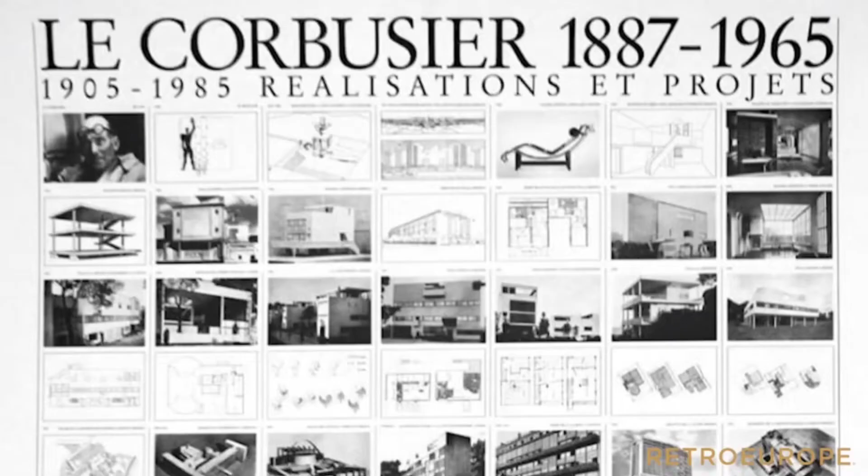Charles Edouard Jeanneret was born on October 6, 1887 and died on August 27, 1965. He was known as Le Corbusier, of international fame as an architect, designer, painter, urban planner, writer, and one of the most influential pioneers of modern furniture.

Without any formal education in architecture, Le Corbusier became a self-taught accomplished architect. In the 30s he was looking for ideal proportions, and he managed to define a system based on the golden number.

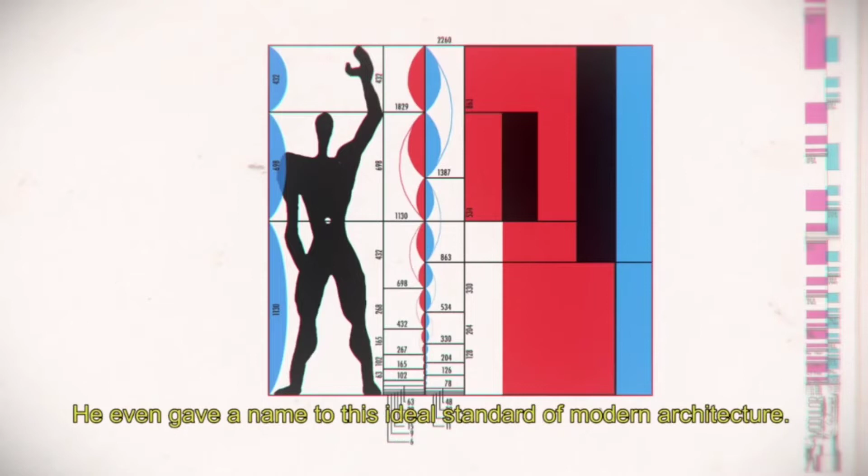This forward-thinking measurement system is based on human body proportions. He even gave a name to this ideal standard of modern architecture: the Modulor. It is based on a 6 foot tall figure, like an average American height, with his hand raised to 7 feet 5 inches. These proportions could be universal.

The 5 points of modern architecture: take a house, break free the floor from the grip of the ground and increase the space of the garden, and free the space of the roof and turn it into a terrace.

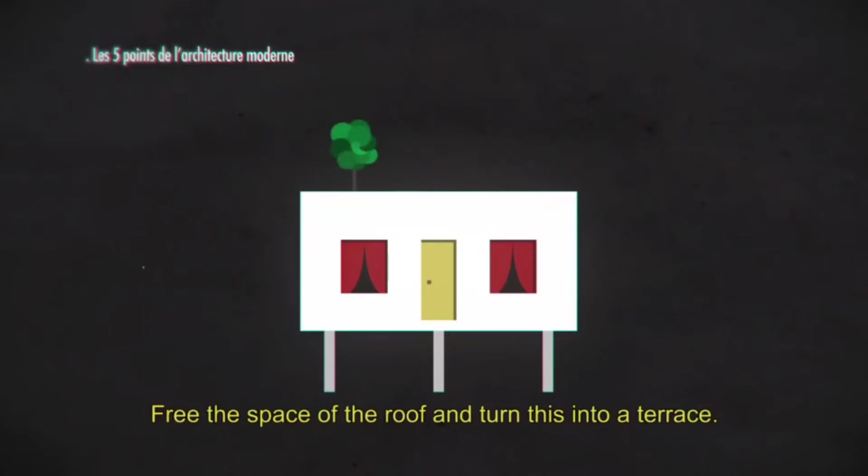Embrace the free plan, a sense of freedom where the inside walls are no longer needed. Poles support the concrete slabs of the upper floor. Say hello to the free facade that does not need to carry anything and now allows light to flood the spaces. For the openings, glass can be largely used.

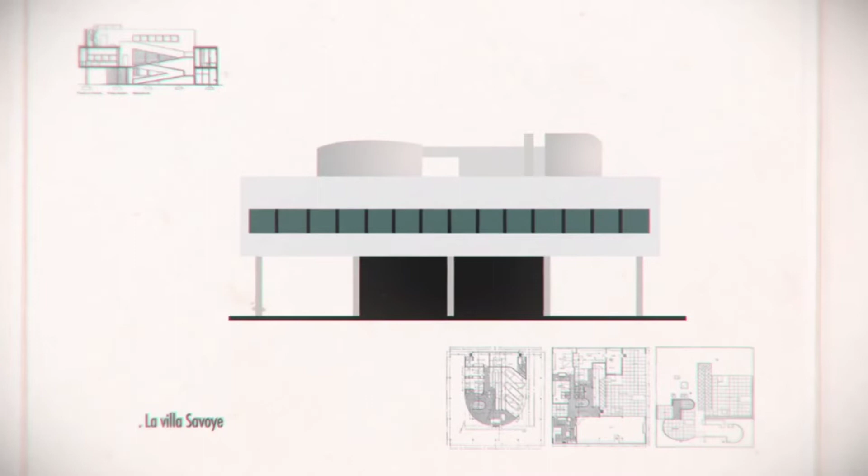Here are the examples: Villa Savoye, Villa La Roche, La Tourette.

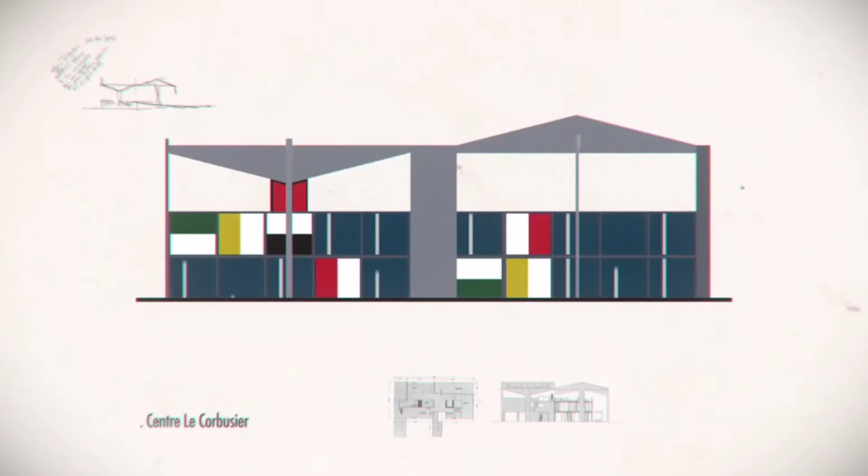The Pavilion Le Corbusier. This building is special for many reasons. This is his last building before passing away in 1965. In 1964, construction started. The building is considered a total work of art.

Not only the building was designed by him, but sculptures as well. Paintings, furniture designs and writings were part of the building. This combination of elements makes it more unique, a full work of art at the end of his life.

His work is very linked to exposed concrete and rough finishes, and although the first concept for the building showed a concrete structure, this was later changed to a prefabricated steel construction. In this case, the change of material was not because his architecture was moving towards the use of prefabricated materials like steel. It was actually hard weather that convinced him metal was the perfect material.

Villa Savoye. Le Corbusier is famous for stating, "The house is a machine for living." This statement is not simply translated into the design of a human-scaled assembly line. Rather, the design begins to take on innovative qualities and advances found in other fields of industry, in the name of efficiency.

The pilotis that support the decks, the ribbon windows that run alongside the hull, the ramps providing a means of egress from deck to deck - all of these aspects served as the foundation of the 5 points of architecture and are found in the overall composition of Villa Savoye.

Upon entering the site, the house appears to be floating above the forested, picturesque background, supported by slender pilotis that seem to dissolve among the tree line, as the lower level is also painted green to allude to the perception of a floating volume. The lower level serves as the maintenance and service programs of the house.